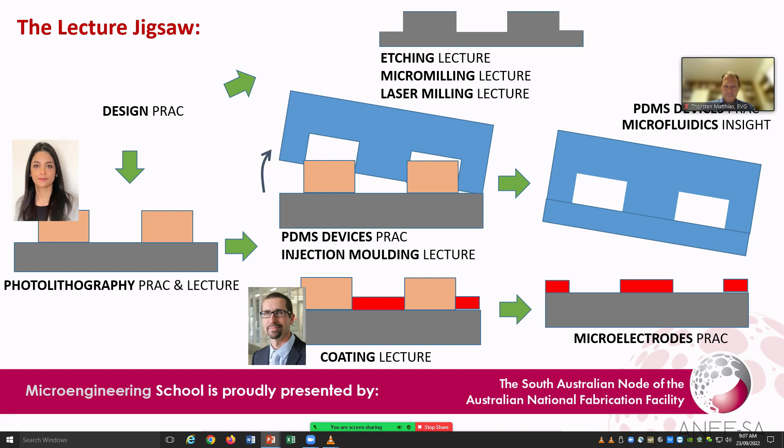Just to remind you of our little jigsaw here, you will have seen a few talks, and hopefully yesterday you took the time to dial in to watch the recordings that we've got. Colin has spoken to you about coating. We've had Mariam on photolithography, Dong Hoon on etching, Ben on laser milling. Now, micro milling you would have seen online, hopefully, a recording from Mark, some really nice work there. Please do check these out, these are fantastic. And Mike on injection moulding and moulding technology. Then today, Coco and Barak. So these are the lectures that you'll see, and of course the insights link all these things together in terms of devices. So by the end of this week you should have a rough idea what steps you could put together to make a small device.

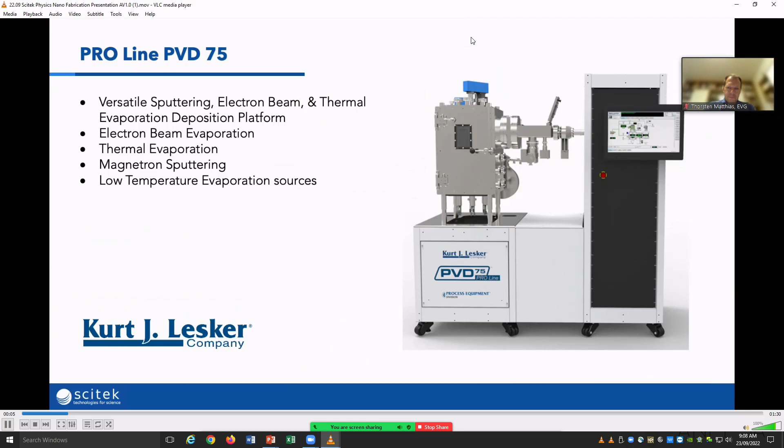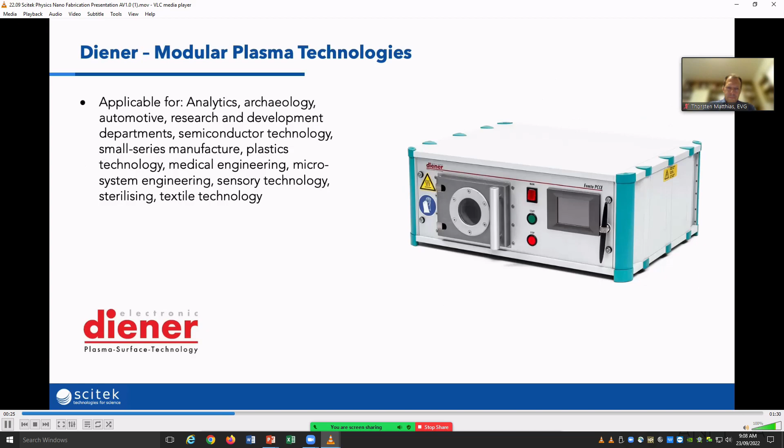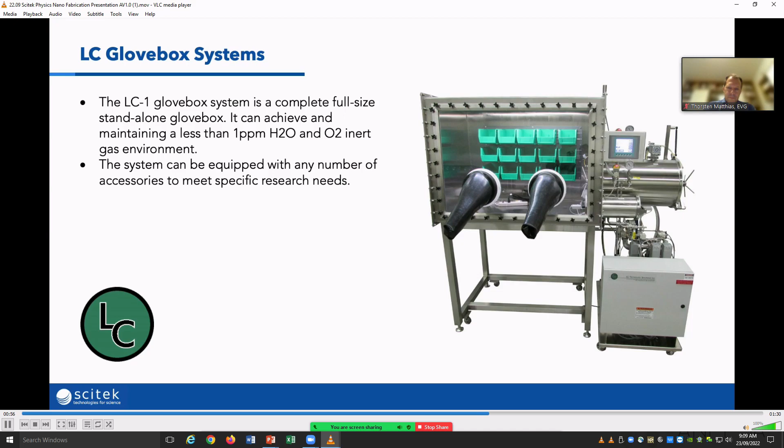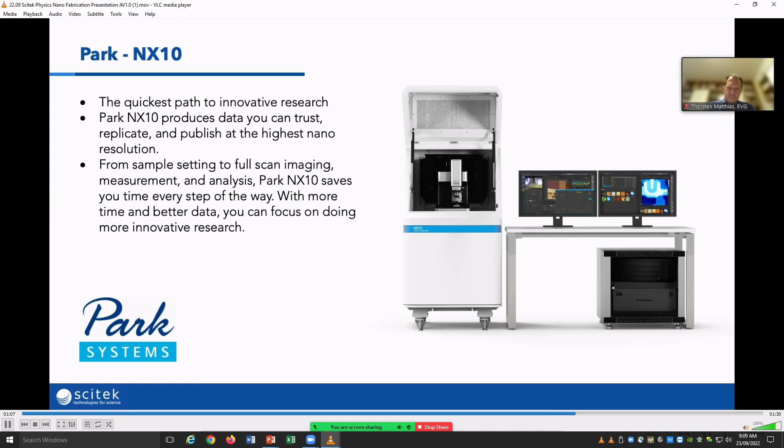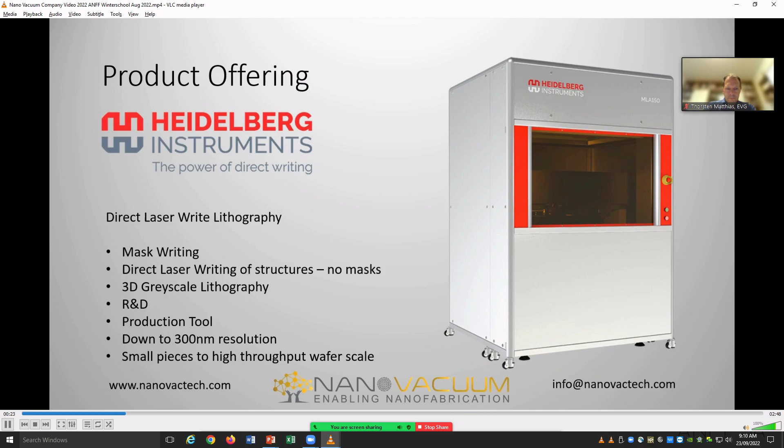So you saw just before there a maskless lithography system. We've purchased one of those for the South Australian node. It will come middle of next year. It takes a while to get these tools in because they're very complex and are made bespoke.

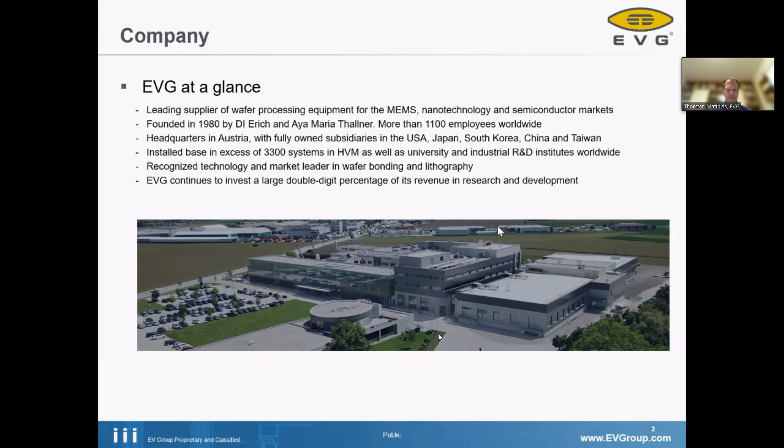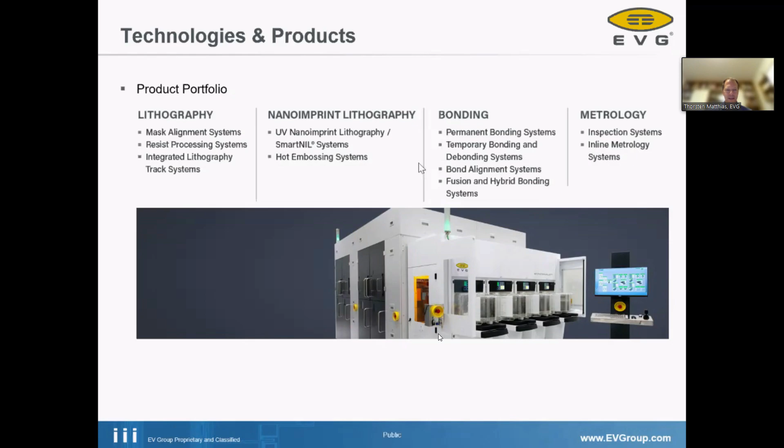Now let's jump into the technology, into the details - let's talk about wafer bonding. When we think about a new technology like wafer bonding, which might not be so familiar to everybody, a good starting point is to define what we want to achieve with wafer bonding, what the outcome is, what we envision if we apply this technology. I'll address some of these in the next 30-35 minutes.

As an outline, wafer bonding is a technology to permanently mechanically connect two wafers to each other. This could be for the purpose of creating a cavity - mechanically building a cavity in my microsystem where I can encapsulate vacuum, or a specific gas or atmosphere pressure. I can use wafer bonding to transfer thin layers of one type of semiconductor onto another, basically creating a stack of different semiconductors. I can use this to integrate wafers fabricated by different companies or in different fabs around the world - wafer bonding would be a means to create, on the micro level, on the chip level, a system out of various components.

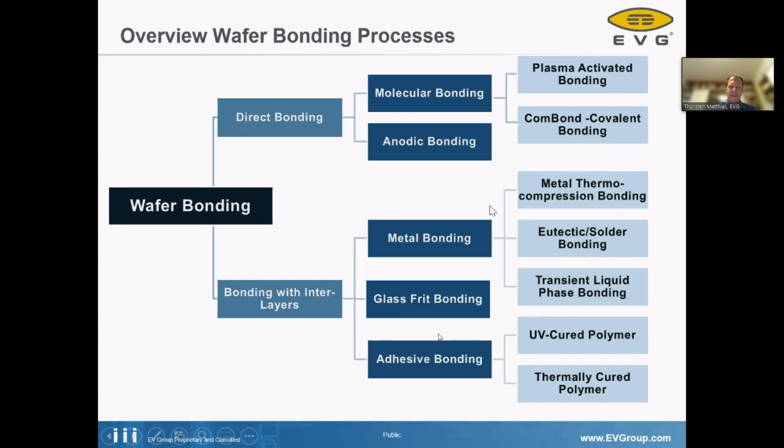Okay, let's start with the very first one, which would be adhesive bonding. You can think about there being a lot of thermally curing adhesives. Thermally curing adhesives have the advantage that they work with all kinds of materials, all kinds of wafers. But it requires a process step at an elevated temperature, maybe 80 degrees, 100 degrees, or even higher, so your wafers, your device, or your substrate has to be able to withstand that temperature.

If this is not an option, then a UV curing adhesive might be a good alternative. However, you have the limitation that to enable UV curing, one of the substrates has to be a glass wafer. Very often the challenge is we want to create a kind of cavity, as you see here. I can create directly out of my adhesive the sidewall, so an entire sidewall is my adhesive, or I create a sidewall with micromachining on one wafer and have a full layer adhesive film on the other wafer.

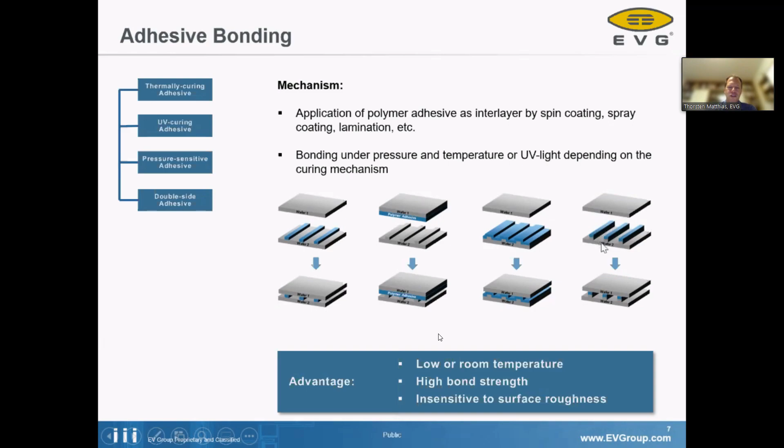I might also apply spray coating techniques, where I can conformally coat the micromachined surface, or I can apply a technique where I selectively deposit adhesive on my already established seal rings or sidewalls of my cavity.

In the course of the presentation, for all these techniques I use this comic-like simplification of the bonding process. The starting point is I have selectively deposited some polymer lines here. I bring the second wafer into contact. This might or might not be under vacuum or in a specific atmosphere, for example if you want a nitrogen atmosphere inside your cavity. Then for the actual bonding, you apply heat and force. When you apply the force, you deform the polymer a little bit. You want to make sure the polymer is really wetting both surfaces very well so that you have a strong connection. Then after cooling down, your bond is established.

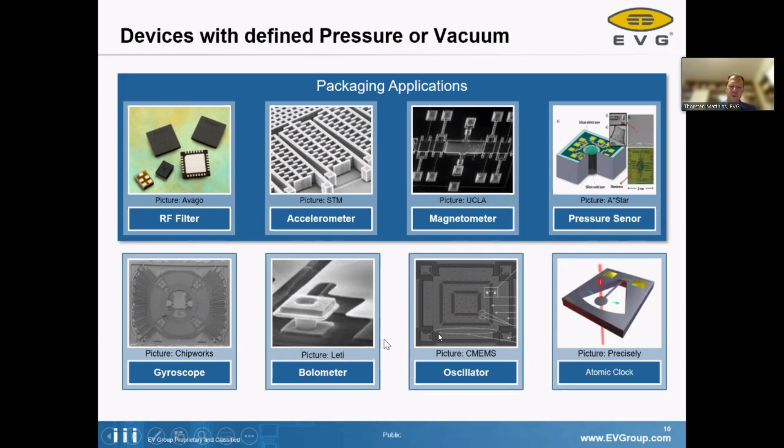And basically in order to read out the signals from our individual pixels, the measurement principle is strikingly simple. Basically you have each pixel in very high vacuum. So if a photon hits your pixel, it starts to heat up. As we have semiconductors, we can measure the change in resistance. That's basically our measurement principle. If a photon hits a pixel, it's absorbed, it heats up, increases the temperature of the pixel, increases the resistance, and we have a signal we can detect, or we can create an image based on the thermal radiation of our object.

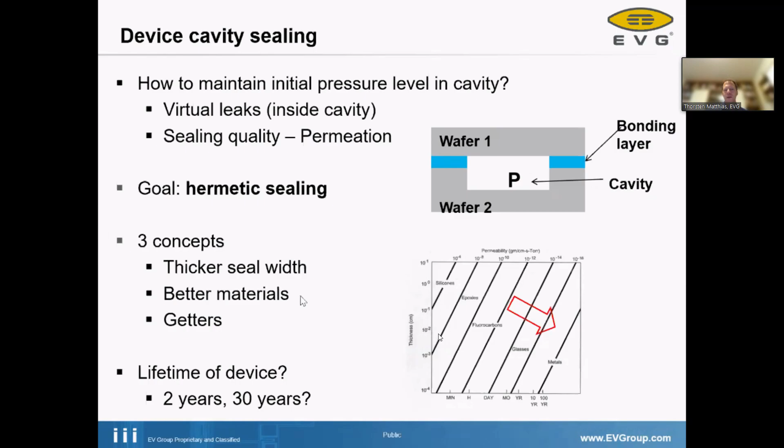So when we talk about what types of metal seal rings we can apply in wafer bonding, actually wafer bonding is kind of a dream world for metallurgists, because here we deal with all kinds of alloys, and we are dealing with it in a very, very pure base. All the materials here are deposited from typically very pure targets. So we can apply all kinds of things which usually are only in the metallurgy textbook. Here in the world of microengineering, microstructuring, this actually becomes a reality.

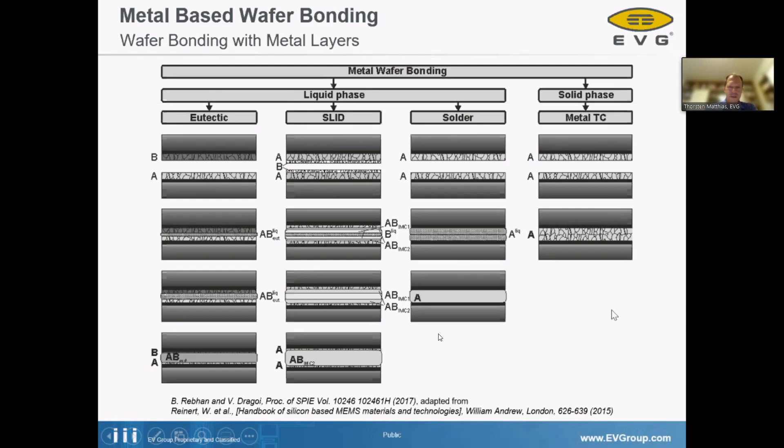This involves us very frequently dealing with real eutectic compositions, where you have two wafers with different alloys, and you have an alloying process. The solid liquid interdiffusion is a kind of subset of eutectic bonding, which I will address in a little bit. All kinds of soldering are possible, and there's also the possibility of diffusion-based thermocompression bonding. In the next couple of minutes, I will go into more detail about these technologies.

So let's start with thermocompression bonding. The idea of thermocompression bonding is basically that I use one material, or it could be an alloy, and I have the same material on both sides of my wafer, and I want to create a solid, permanent contact.

Basically the key mechanism, when you bring two metal surfaces into contact, you will always have some kind of diffusion between two surfaces, but you have to ensure that the surfaces are really, really close to each other in order that we have metal ion diffusion of any reasonable rate.

The materials we are talking about, most common is gold-gold bonding. For example, for RF filters, gold-gold bonding is being used, probably in all of your cell phones, you have some RF filters with gold-gold bonding involved. Aluminum, I will address in a little bit in detail. It could also be used, or copper bonding to copper bonding.

These bonding methods require a very high temperature, very high in terms of what typically the devices can or want to withstand. We have to go to a higher temperature, meaning a higher diffusion rate, meaning a lower cycling time. So this is basically the magic. There is a range, but the temperature is reasonably high for microelectronic devices.

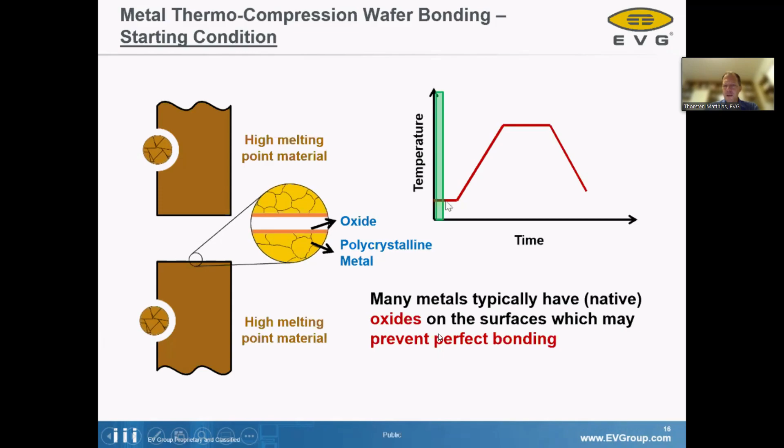In the case of wafer bonding, typically we flush the surfaces with reactive gas, like forming gas, or you might have a formic acid bubbler in order to reduce the surfaces and get rid of the oxides. And this happens at a starting point of the process, might be room temperature or slightly elevated.

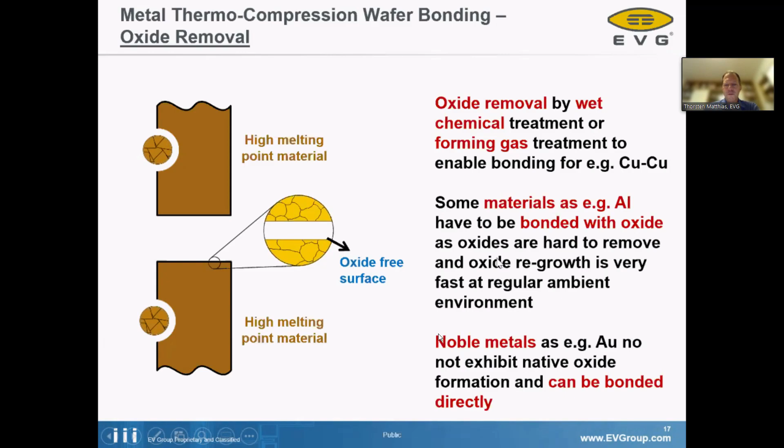Ideally, we are successful, we create oxide-free surfaces, and then we can bring the surfaces into contact, and then we start actually heating up, starting the bonding process and then increase the temperature.

Now here an important point is we need, for metal thermocompression bonding, very, very flat surfaces. So the wafer bonders can technically apply reasonably high pressure so that the materials can overcome a little bit, we can flatten out the surfaces a little bit, but the higher your density of your seal rings or so, it becomes very difficult to overcome.

If you have a gap in the interface, then basically you have a permeation path, a penetration path for gases, for moisture, and you will run into issues with the sealing quality, right?

Okay, so yeah, once we start heating up, basically we start to see metal ion diffusion. Typically the diffusion path is across our grain boundaries, which is kind of the diffusion highway in a metal system.

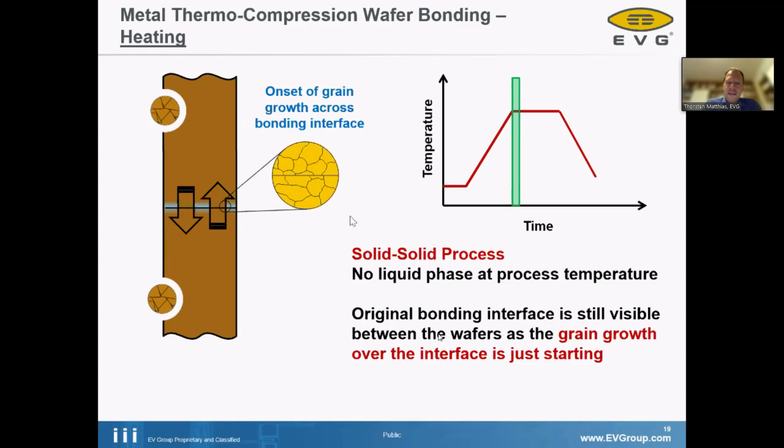So here we see, on this picture, basically what you want to see in your microscope. If you look at the interface, the bond interface has disappeared, and you see the nice grain growth across the grain boundary. At this point, your wafer bond is established, the connection is established. Typically in the system you cool down the wafer, but cooling itself does not have any impact or functional component for the metal thermocompression bonding process.

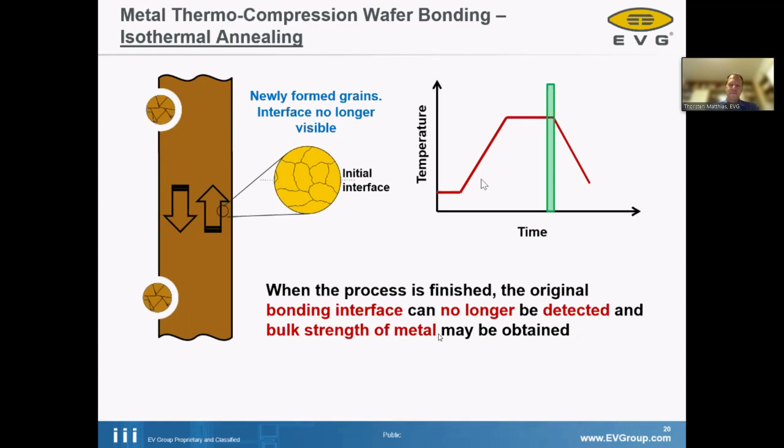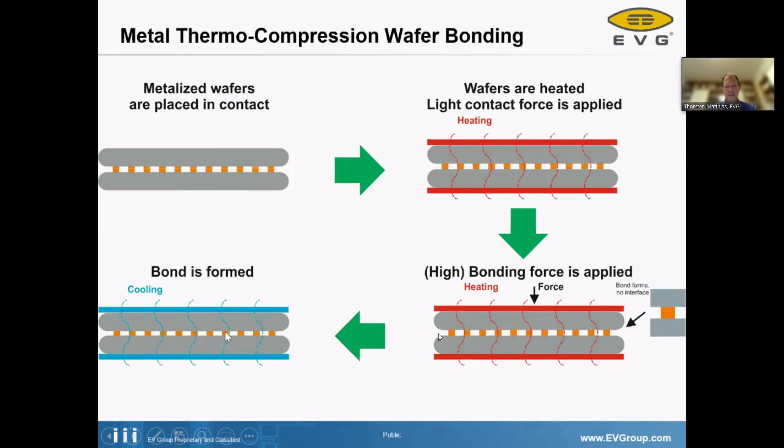So here I have again my cartoons. I bring my two wafers in contact. Typically in the wafer bonder I still have to apply some flushing with oxide removal, forming gas or something, to treat the oxide removal. Then I bring my surfaces into contact, I heat them up, and I typically apply a very high bond force. Thermocompression bonding is not the fastest process in the world, so typically we are looking at something like 20-30 minutes bonding process time, or even more. Then finally I cool it and I have my nice cavities and very good metal-based seal rings.

Now another very interesting way in comparison to metal thermocompression bonding would be eutectic bonding. I think you have all seen in your engineering classes at some point the eutectic diagrams, the phase diagrams. Here we have for a binary alloy like gold silicon, and we want to use this kind of oddity of nature that at a specific stoichiometric composition, the liquidus point is lower than at other stoichiometric compositions.

What this means is that during the bonding process, you start with solid metal surfaces on both sides, but during the bonding you have a short period of time where you create a liquid phase, a liquid metal film, in your bond interface. If you have a liquid phase, it becomes a lot easier to close all the gaps, to fill all the trenches or crevices you have on your wafer, in order to create a very nice hermetic seal.

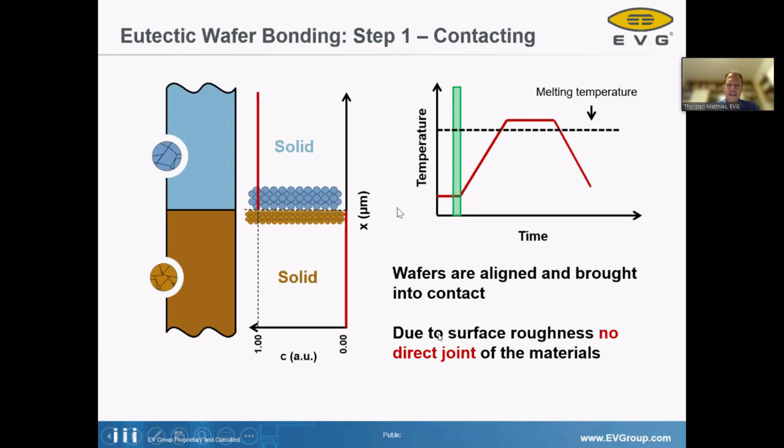So here we see again, I use the same kind of cartoon style demonstration for the bonding process. Let's assume I have a binary alloy, material A and material B. I bring the two materials into contact. At this point, I have two solid interfaces. But then during the heat up, I already see some kind of metal ion diffusion.

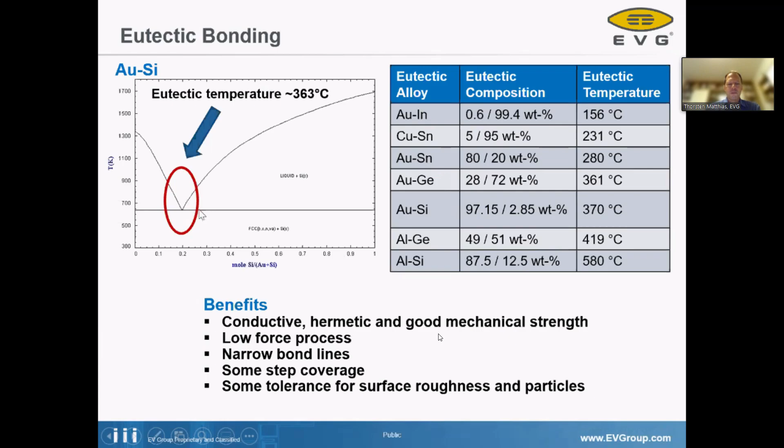What happens is, as I have this metal ion diffusion, I'm actually moving in my phase diagram from both sides towards a stoichiometric composition where I have the lower liquidus point. At some point, when I've had enough of this metal ion diffusion - here we see the temperature curve in the bonder - my entire system is at a temperature higher than my eutectic point. Then I start to see some liquid interface, and all my voids, gaps between my seal rings, are being closed just by the properties of having a liquid in the interface.

Then I have to cool down. In this case, the cooling down has to be very accurate, because if cooling down a liquid were not homogeneous across the entire wafer, it would be very easy to integrate stress into your device. Especially for a lot of MEMS devices, if you already create stress by the package, you probably already create some drift in your sensor. So cooling, especially the very first part going from the liquid phase to the solid phase, is very important for eutectic wafer bonding - you must do it very, very controlled.

The symbolization is very similar to what we have seen for metal thermocompression bonding, but the main difference is, in this case, during the bond process I go shortly through a liquid metal phase, which means with eutectic bonding it's a lot easier to deal with gaps in your interface. In other words, with metal thermocompression bonding, you have to take a lot more effort to avoid having gaps in the interface prior to the bond.

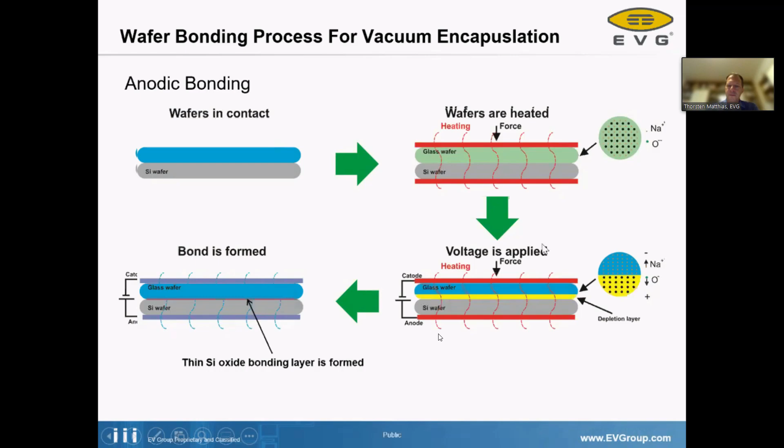But if you need a super strong interface, then anodic bonding is definitely one of the good candidates, because the bond interface, due to this migration of the oxide ions into the interface, creates a strong oxide layer. I grow a really strong mechanical contact between my two wafers.

Okay, and now coming from the world of the microelectromechanical system, the second example I wanted to show you is more from the microelectronics world, the more high-end devices in microelectronics.

As an example, I have here the backside illuminated image sensors, but then I will also draw the connection to some of the newest generations of CPUs, GPUs.

So in semiconductor manufacturing, I have the situation that in order to create a diode or a transistor, I need to implant selected areas with my dopants, and then activate the dopants at a very high temperature. The temperature required for dopant activation is higher than what the metals could later withstand. So the metal is a natural enemy of a semiconductor.

I need it as a means to transfer the electricity in and out, the signals in and out, but I cannot have them in my transistor area. So what this means is, in every semiconductor in the world, you first have to create your transistors, and then later on you deposit your metals on top.

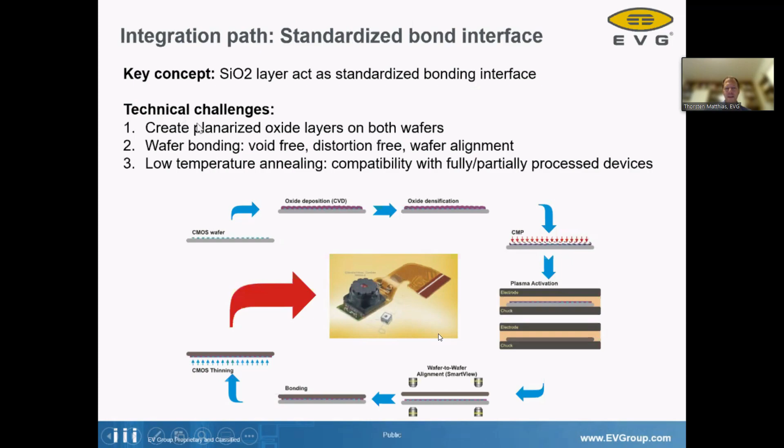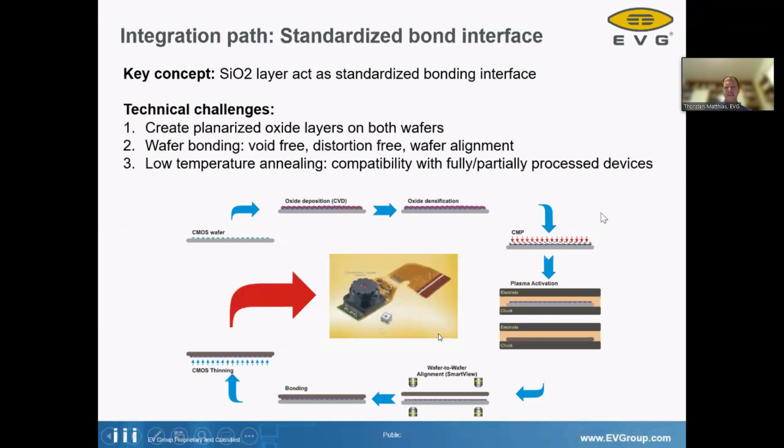It's void-free, it's very high alignment, it's very fast. So technically speaking, if I can create oxide layers and planarize them on both wafers, then I can use this fusion bonding in order to bond any kind of wafers, any kind of devices, and connect them permanently.

Just some trivia. Basically, this fusion bonding was first described by Galileo Galilei nearly 400 years ago. You probably know this phenomenon: if you have two microscope sliders with a droplet of water in between, and you press these two sliders together, it's very difficult to pull them apart. This force you are feeling is already an example of fusion bonding.

In the microelectronics world, this process has been used for many years. For example, all these so-called silicon on insulator wafers, where a lot of today's devices are being created, start with the wafer bonding, fusion bonding process in the wafer manufacturing.

So here, in a little bit more detail, how is wafer bonding or fusion bonding applied. I have my two wafers. I have to ensure that I have really super clean surfaces, so any particle in the interface will create a large defect. This is really a semiconductor fab process with front-end cleanliness required.

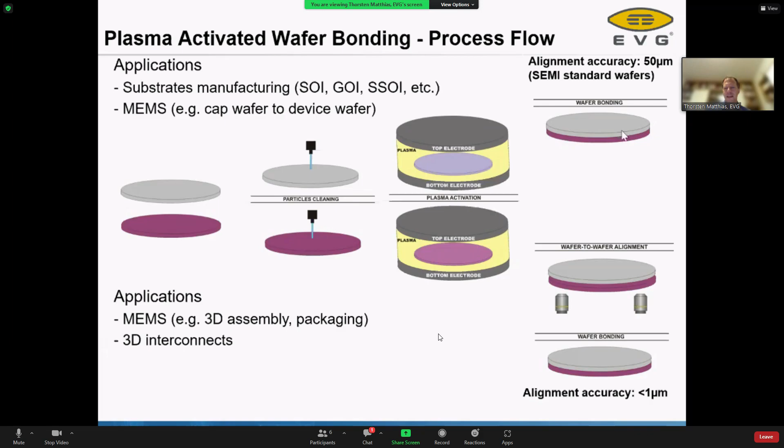Then there's a plasma activation step, and then finally the bonding, and the bonding actually happens at room temperature.

We have a so-called plasma activation, which means we are disturbing the crystallographic structure of our interfaces. We are enhancing the entropy in my system. Then with a very moderate annealing temperature, I can start a recrystallization or reorientation of my crystal lattices, of my oxide layers, and I basically get a gap filling. With fusion bonding, we are able to achieve bond interfaces without any gaps, without any voids.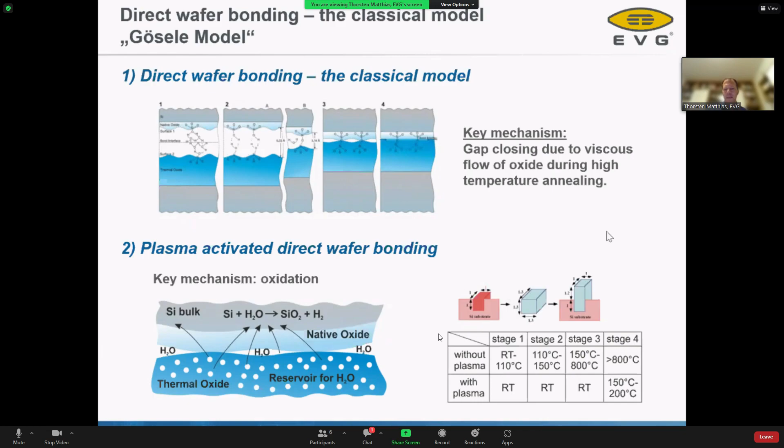So the bonding itself happens at room temperature. Initially, I create some hydrogen bridge bonding, but during the annealing process, this is transferred into a full area covalent bond between the two wafers.

And for those of you interested in microelectronics, if you look at the roadmaps of the next generation of transistors, you will see that in a couple of years, for the leading edge transistors, we will see more integration of different semiconductor materials into the transistors, and then probably in roughly 10 years or so, a transfer of 2D materials like graphene, also used for transistors. This transfer of 2D materials would also apply a wafer bonding process.

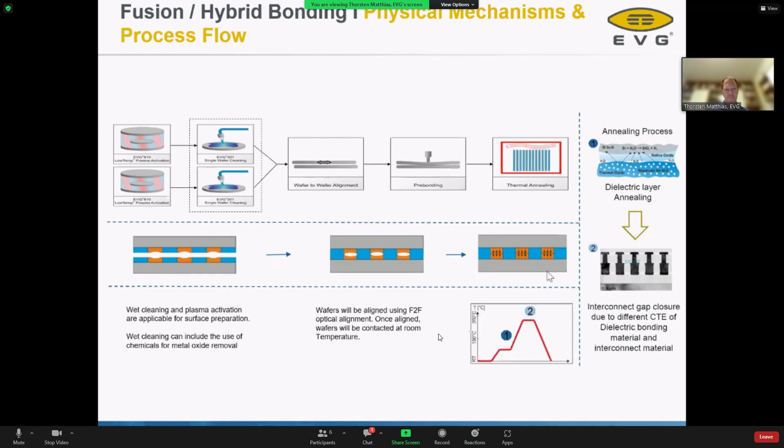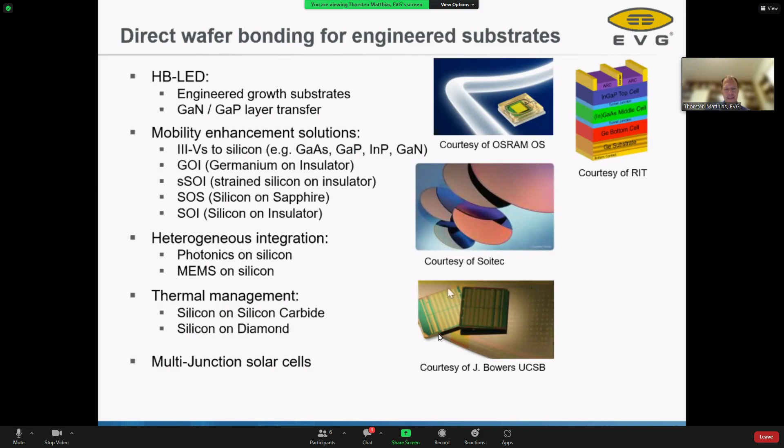On this slide, I just have that wafer bonding is being used for a lot of things. A lot of your electronic components of your cell phone use it today, and it's actually quite a versatile method. So to summarize...

It's established very well in high volume manufacturing—thousands of bonds every hour around the world, either for encapsulation of a cavity or for integration for the permanent connection on the micro level of two or more different devices.

In the lecture today, I wanted to give you a bit of an overview of how the basics of engineering are applied here for microsystem engineering, where we have the chemistry and physics of adhesive bonding, all the metallurgical and alloying processes, but also fusion bonding.

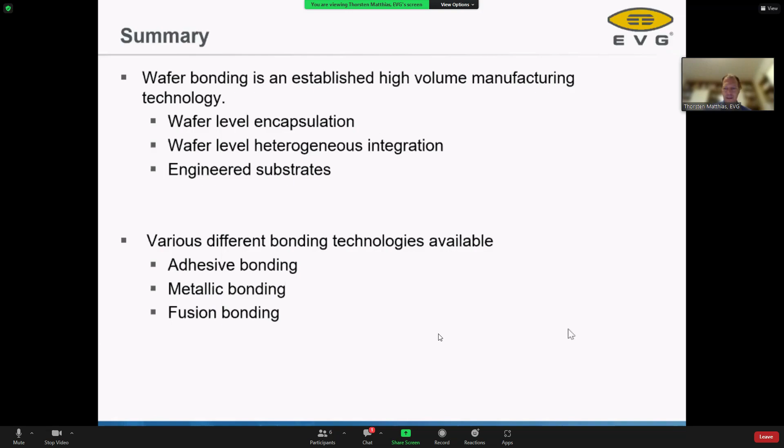So I think that this would be the end of my lecture for today. If you have any questions, I'm more than happy to answer them.

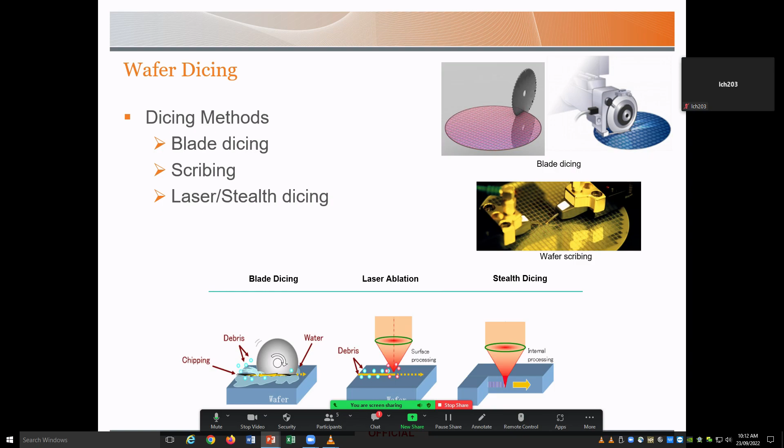So blade dicing is a common technique, especially for smaller research scale applications. This is what we use at DSTG, and this is also what is used at ANFF-SA at UniSA. In the blade dicing method, a diamond impregnated blade is used, very similar to how you might think of a circular saw, to dice up your wafer into individual die.

So how this is done is the wafer is attached to adhesive tape, which is mounted on a frame, and then this frame is aligned in your wafer dicer. You can program your machine to dice down your dicing streets, which is basically just the distance between your individual devices. It will dice first in one direction, and for most applications you have square or rectangular chips, so you will rotate by 90 degrees and then dice again in the other direction.

So there are quite a few benefits to using this blade dicing method. It can cut relatively deep in terms of microfabrication - a 1 millimeter thick wafer can be thought of as quite thick. It's very accurate, especially with these new automatic dicing machines. It's very repeatable as well. And it has a low running cost, which makes it very useful for research scale. So your only real consumable here is the blades themselves if you look after your machine properly.

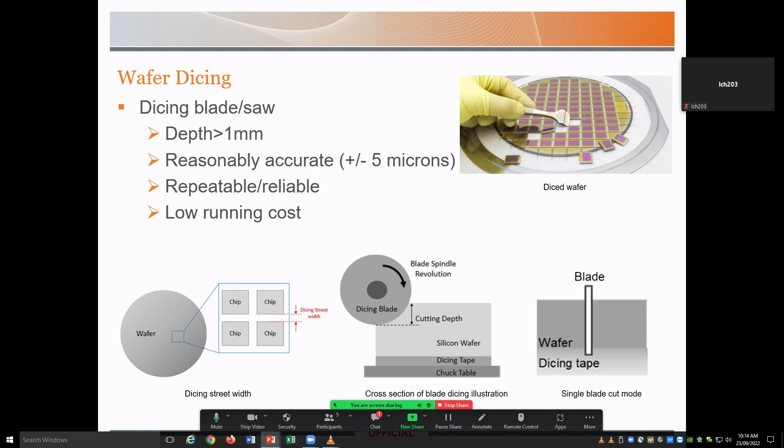So I'm going to talk a little bit now about the optimization of the actual dicing process. Obviously our number one objective when we are dicing is to cut nice and straight so we get really nice dies with minimum chipping and no heat damage. Secondary to that, we also want to protect our blade so that we can use it over and over again and reduce the running cost of the machine.

So as I mentioned, this is a physical technique using a diamond impregnated blade, so there's a lot of frictional heat generated in this process. This means that there has to be a water jet running which is directed at the interface of the blade and the wafer at all times, and this also helps with the removal of any debris that's generated during dicing. So there are a few things that we have to consider to optimise this process, and the properties of the blade that we choose is going to depend on the material that is being cut.

So, also the patterning of the devices on that wafer. The thickness of our wafer is going to determine the diameter of the blade that we need to use, and the street width is going to determine the width of the blade that we need to use.

Generally, you need to account for your kerf width being double the width of your blade, and your street width needs to be a little bit wider than that to account for any chipping. If you choose your parameters correctly, chipping should be kept to an absolute minimum.

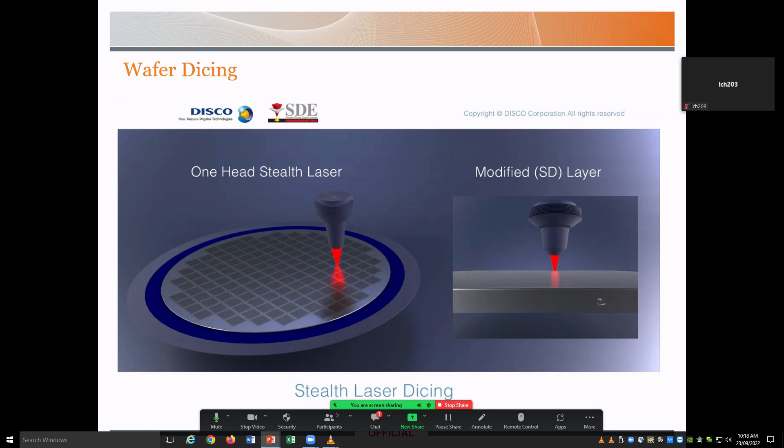It's cutting down the streets in the same manner as blade dicing, but it actually makes a modified internal layer of micro cracks. This means that when we expand the tape in every direction equally, these micro cracks are able to propagate, and it forms really nice smooth dicing lines.

This is really good because there's no heat damage here. It's also a lot faster than blade dicing, but it is extremely expensive. So for a commercial application, this would be more common than blade dicing, but it's not what we use on a small scale.

I'll pass over to Barak. Thanks, Joko, for dicing the wafer for me.

You can see in the monitor in this image, we need to pick one of these dies individually.

So from our experience, we used to pick these individual dies manually. However, this process can be very challenging because the dies are very small, and also it can be time consuming.

Because these dies are really stuck onto the dicing tape, we can physically damage these chips.

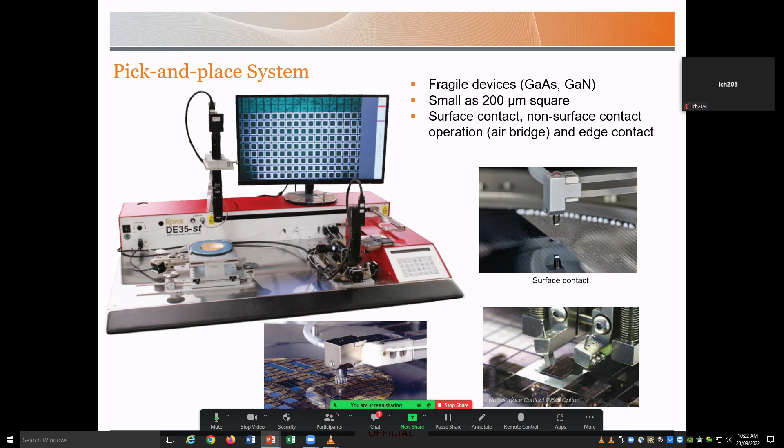So we have our die, individual die, and now we've got our printed circuit board or any desired substrate, and we need to place our individual die on top of the substrate. How do we do it?

So we place either conductive or non-conductive epoxy, drop off the epoxy on the substrate, and then we place the die on top of it carefully, and we put this in the oven to cure it. So we follow the instructions from the data sheet, depending on the epoxy we are using.

So the next step—we cured our die on the substrate and it's physically attached to the substrate, and then we need to make sure there's an electrical connection from our chip to the terminals. So the most common technique is the wire bonding technique. Wire bonding is a standard interconnection technique that enables electrical connections from microchips to the terminals.

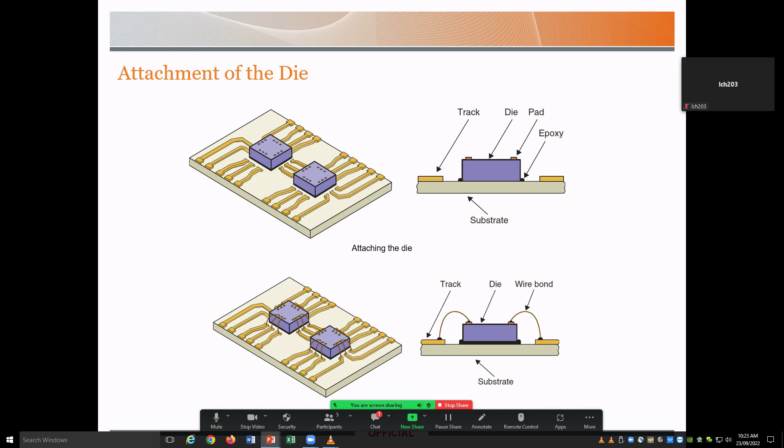Wire bonding is categorized by the bonding method. The first technique I will talk about is ball wedge bonding, and we generally call it ball bonding. So what happens here is, in the first step, you have your capillary, and you feed your wire through the capillary.

There's an electrical flame-off, an electrical spark, and it creates a free air ball, as you can see in the second step. Basically what happens in the second step is this melts the wire, and due to surface tension creates this free air ball. Then in the third step, the capillary moves towards the first target, creating your first bond with the ball shape on the first target.

And then the capillary, your bonding equipment, starts moving towards the second target and creating a loop shape. Then the capillary—sorry, I forgot to mention the third step—by applying ultrasonic energy and heat as your forces, you create this first ball.

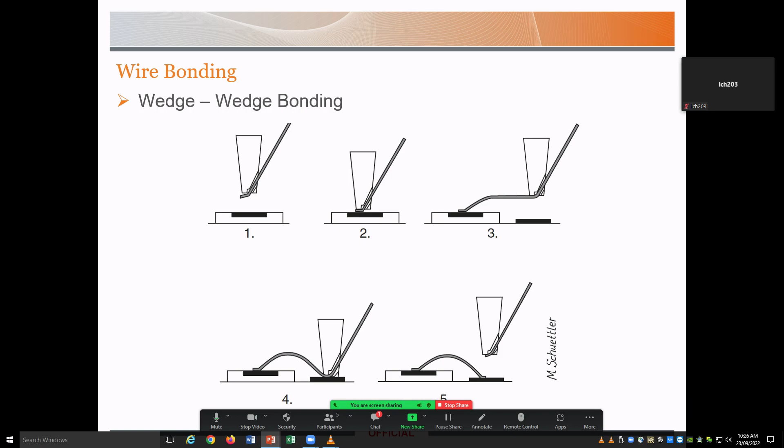And then the bonding tool moves upwards. So these two techniques have advantages and disadvantages; however, the bonding method is decided by your application. You can clearly see in this image, in this video, how the ball bonding is created.

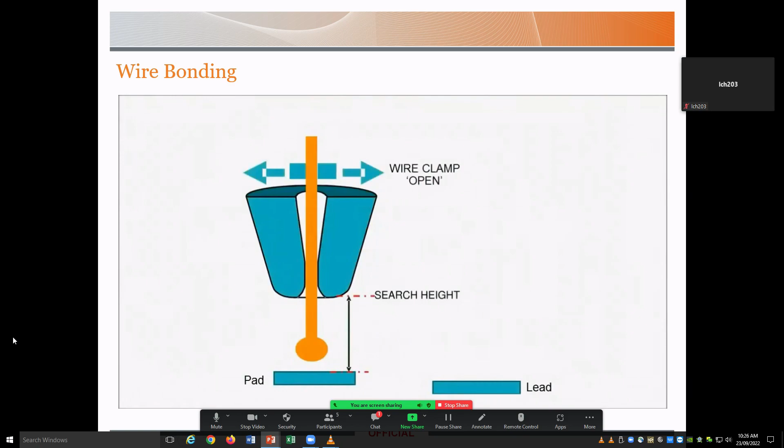Applying heat and ultrasonic energy creates the first bond, creates the loop, and the capillary is moving towards the second target.

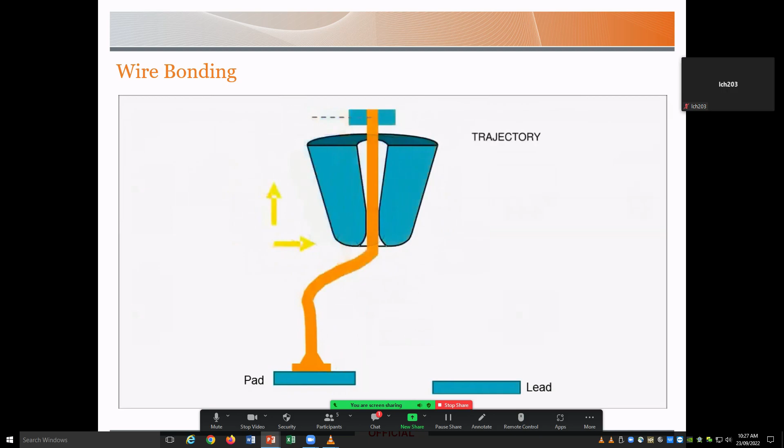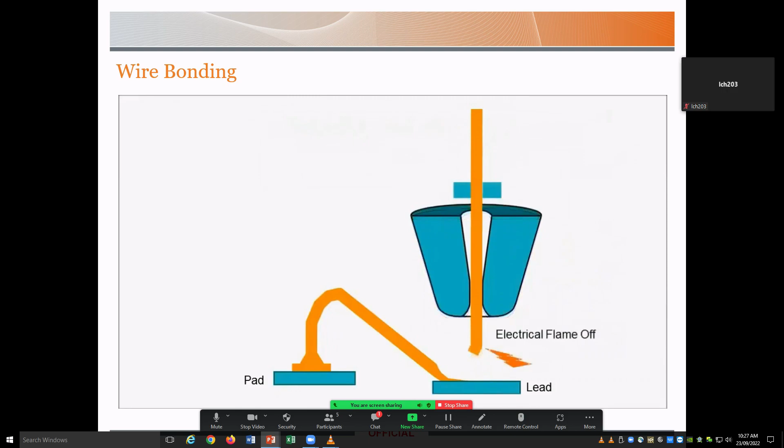We are about to create our second bond, it's a bit glitchy, sorry about that. Creates the second bond under the heat and ultrasonic energy, and the clamp closes and tears the wire. And creates again, you can clearly see the electrical flame off, creates the ball for the next bond.

And reverse bonding. So why do we need reverse bonding? In order to have a stable wire bond, in some circumstances we need to do reverse bonding. Generally, wire bonding is considered as forward bonding. However, a chip like you can see in this image, a high chip from the substrate, you might need to have control of the angle of your wire, and you might need a longer wire loop.

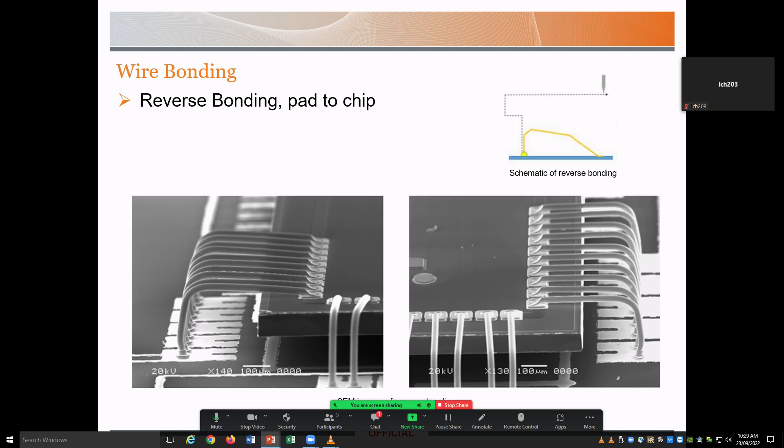So in this case, the reverse bonding is required. In my experience, I had a similar chip, like a 1 millimeter high chip, and I tried to do forward bonding. However, the wire hit the edge of the chip, and this caused a break in the wire. So if we do reverse bonding, we have a stable wire bond.

So what do we have at DSTG as a wire bonder? We have manual wire bonders, and also we have automatic wire bonders. When I started at DSTG, we only had one 58 series F&S bonder. Now we have two of them, and we have changeable bond heads. This machine is capable of manual and automatic bonding, and you can have one wire per second.

So the top one is the ball bonder. We have two wedge bonders, depending on the size of your wire, and we have heavy wire bond heads. Also at the bottom you can see a little image, and this machine is capable of doing multi-wire programming. You program it, you can see on the screen the microscope there, and you can program your wire bonder to do hundreds of wire bonds.

This might take a little bit of time, because when you say automatic wire bonder, it might sound straightforward. However, this programming takes a little while. But when it's programmed, you push one button, start, and it does the job.

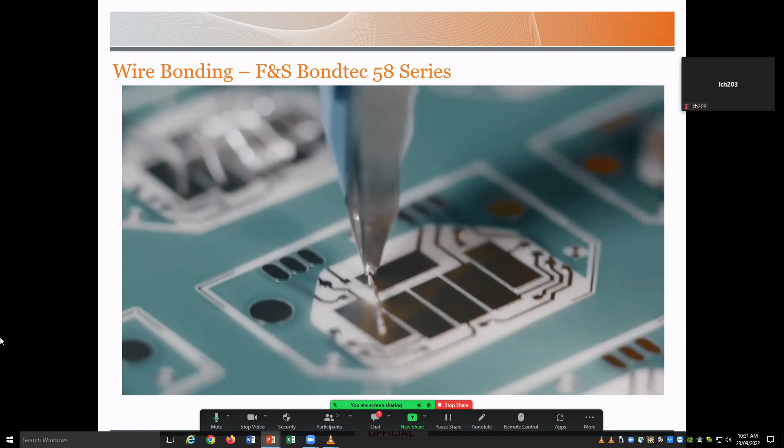So this is the video of our wire bonder. You can see this is a wedge bonding with the aluminium wire.

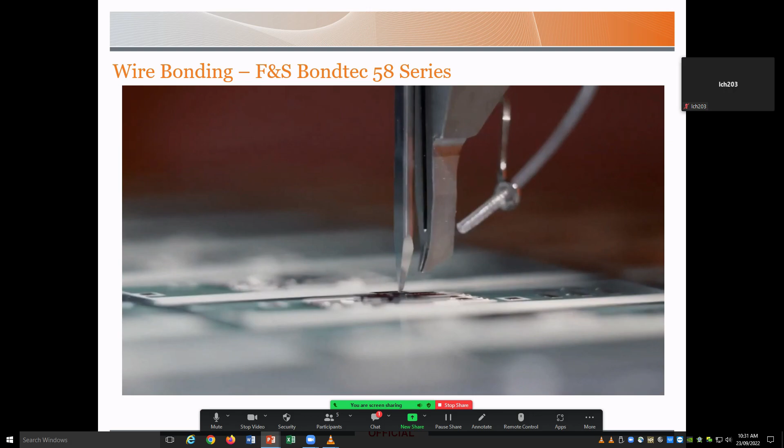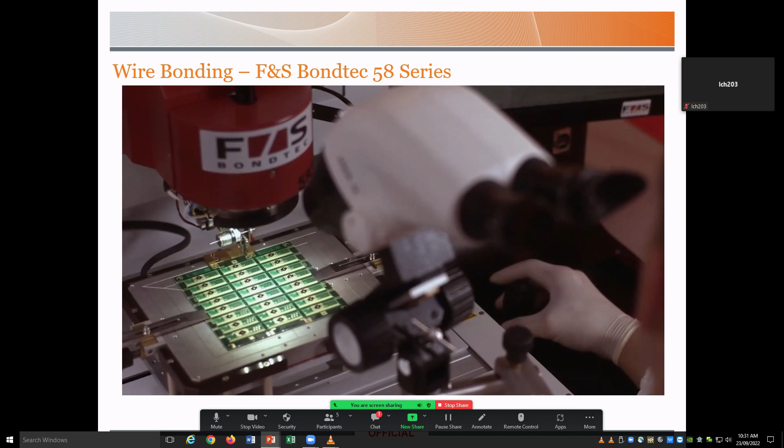So obviously this has been programmed, and you can see how quick this is after it's programmed, and bondable changeable bond heads, very straightforward. You just need to calibrate after you change the bond head. You can either inspect through the microscope or through your monitor.

This is an example of some of the applications. We don't do it, but this is part of the F&S Bondtec, so you can do battery bonding.

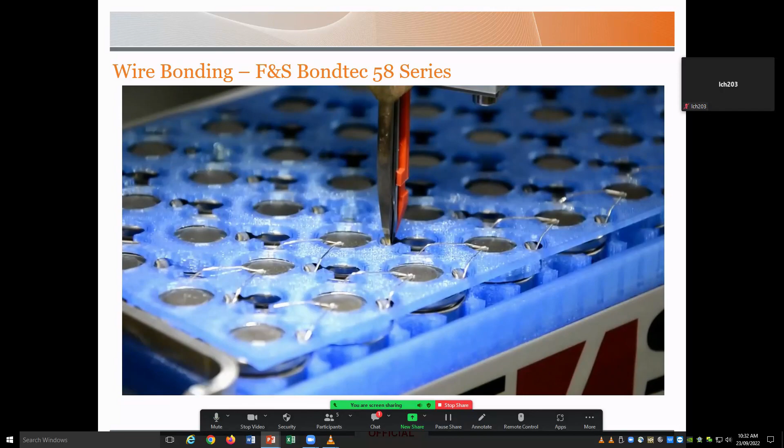So another capability we have at DSTG is flip chip bonding. Flip chip bonding is another micro packaging technology, a bonding technology.

In the top image you can see there's your die, and you have perfect spheres on the pads of your chip. Then you flip your chip and take it onto the substrate and place it on top of the corresponding pads with the substrate, and then apply heat. This can be on a heated stage, or these solder bumps can be cured in the oven.

So here on the left-hand side you see a flip chip bonding system. Basically there's a vacuum stage, there's your flip chip, and there's a substrate with the gold bumps on it, and there's the heat stage.

So what happened here is your flip chip is picked up by the vacuum tool and then placed onto the substrate on top of the gold corresponding contacts, under controlled force and heated through, and these bumps are cured.

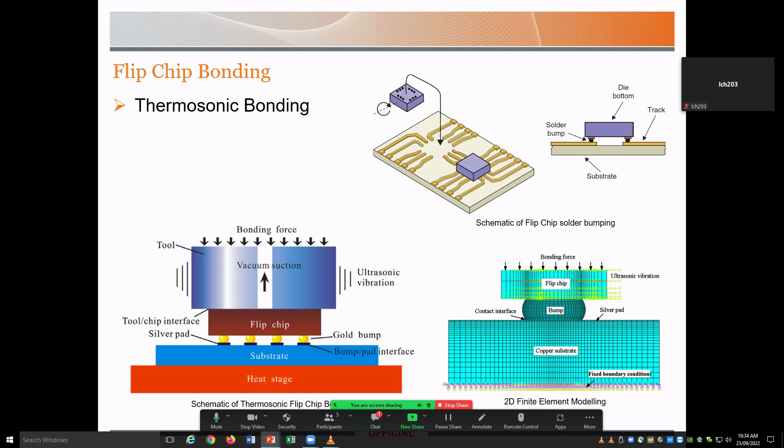So how do we test these wire bonds? Before I go into wire bonding testing methods, the more important part is the material. In the ball bonding and wedge bonding slides, we basically use wires from 17 micron to 50 micron at the moment, depending on our applications. Gold and aluminium wire are 25 micron diameter, and in the past copper wire has been used. So you have your design, your die, and depending on the fabrication process, you choose your wire materials.

Also, the substrate, your printed circuit board, plays a role. The metallization of these printed circuit boards is really crucial, because you need a reliable, stable, very strong bond from your chip to the printed circuit board. You have to consider this when designing or purchasing your PCB. Also, the pad size is really important, because you don't want your bond size to be bigger than the pad size on the substrate or on your chip.

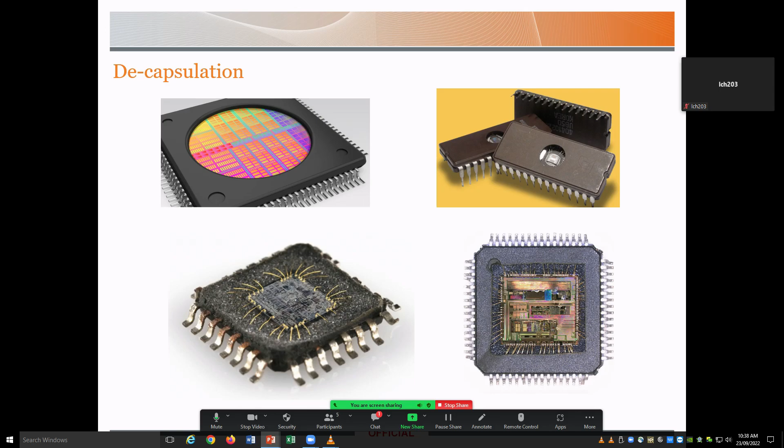The first step before we jet etch is to X-ray our package. This shows us the location and size of our chip within the package. We can also see some wire bonds here too if you look closely, especially with a high resolution X-ray. If you can see that some wire bonds are already broken, it means that during the jet etching process you can just decapsulate a specific area and focus on where that failure has occurred.

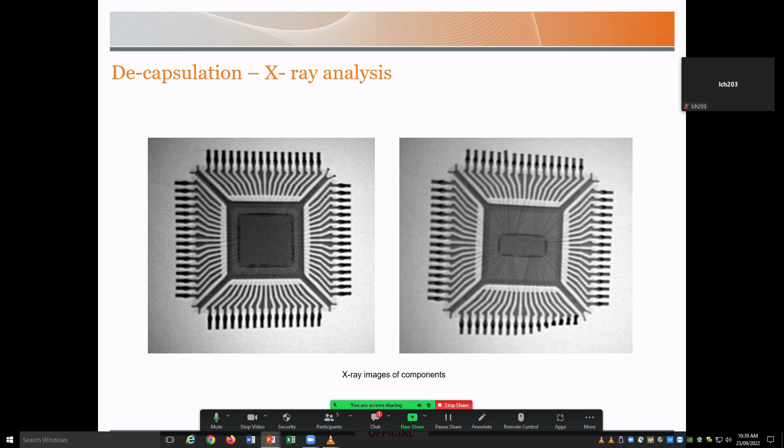With jet etching, we generally use two different types of acid depending on what the package has been encapsulated with, which type of polymer, and that is fuming nitric and also sulfuric acid. We can program this machine to heat a specific volume of acid over a specific period of time to a specific temperature and expose our package to that acid, which will gradually react with the polymer surface and expose our die.

Then our package will go through subsequent cleaning stages, and we can assess under the microscope whether we need to do further decapsulation or whether that is sufficient for our testing. At this point, if some wire bonds are also exposed, we can go back and do wire bond pull testing as well for quality assurance.

It's worth noting that with these jet etching machines, they're completely encapsulated themselves, so there is no actual contact between the operator and any acid, so they are very safe machines too.

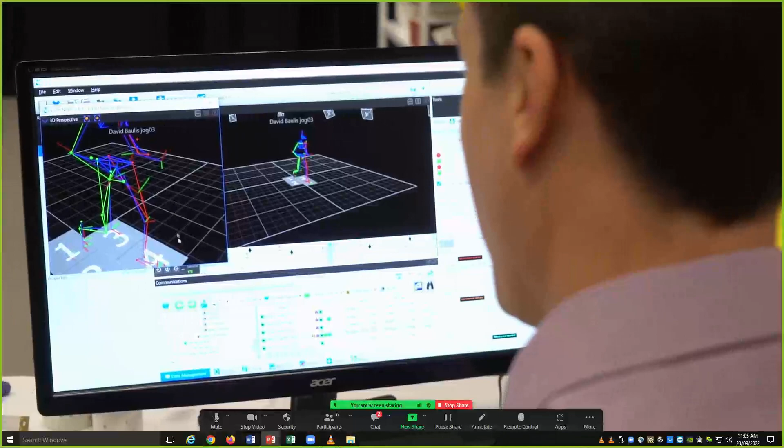The medical device partnering program is fantastic because it gives you an opportunity to be involved in possible product development or prototype development. So at that leading edge of where an idea might be coming from an idea into something tangible, and having lots of input, which brings so much experience to the table as well.

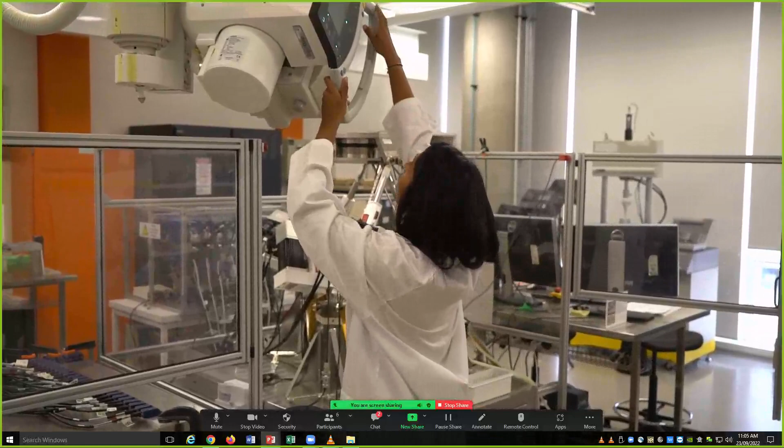And you can have multiple experts from multiple domains looking at your idea from all of their different perspectives. So it can be mathematicians or engineers or designers and end users, people who might use it and people who might make it for you as well. It's even hard to describe how valuable that is to someone who's just got an idea and who wants to move it forward.

I was looking for ways of collaborating on these projects to try and commercialise some of the ideas that I was having through my work as a registered nurse.

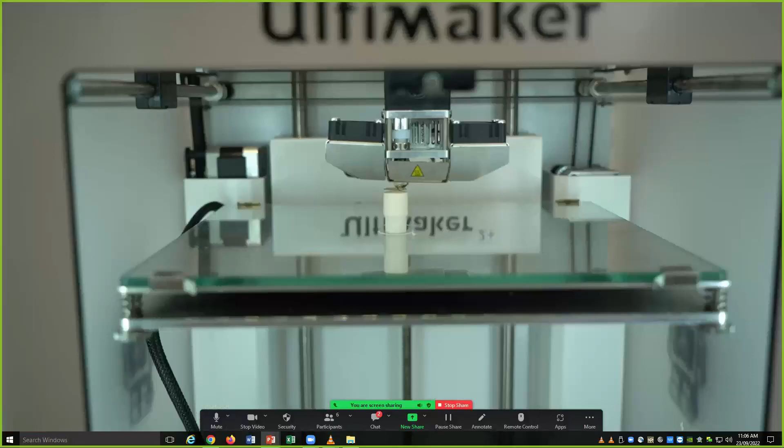We've needed 3D printing, engineering support. There's a lot of complexities. It also gave us access to academic staff, which we needed, because we were looking for proof of concept.

So we sat down and they really critiqued the project to look at some of the things I hadn't considered, some of the commercial aspects, some of the manufacturing aspects.

And actually, it's not just research for research's sake, it's research that will help develop ideas, but ultimately help to benefit patients. So it really is focused about improving clinical outcomes, improving quality and safety, and making something efficient and making something work.

It would have made such a difference to me and all the women I met while I was going through treatment to have had something like this that would have allowed us to just have one surgery. Just a few weeks can make an enormous difference. We just need as many tools in the toolkit to deal with cancer as we can possibly get.

The MDPP was able to provide market support research, which was critical to actually being able to get this device to the point that it's at the moment.

So that video is good to give a bit of context on some of the people that we work with, and to show that it's having real-world effects. And a lot of the people who do come are typically clinicians.

Really, the MDPP's initial vision was to make Australia the fastest place in the world to take an idea for a medical device from the idea stage all the way through to having a product on the market.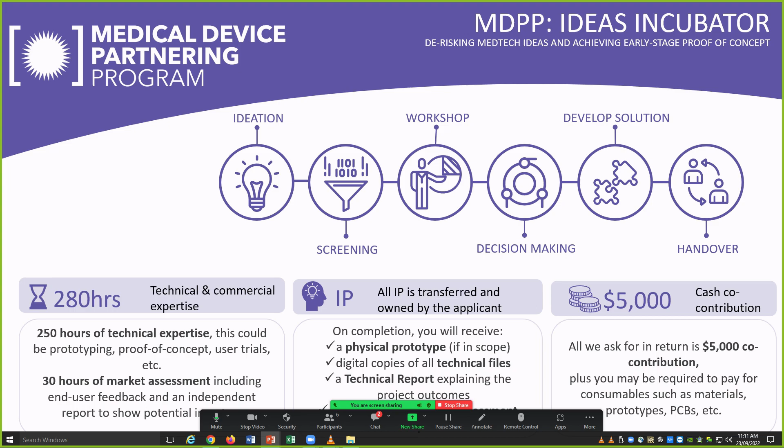We're very lucky the program's been running a long time, so we have very good links into the clinical community. Where companies may struggle, we're really able to get some very valuable people. We've had companies that haven't gone on to do the 250-hour project with us, but off the back of the workshop have created a company. Then we have an independent assessment panel that ultimately makes the decision on whether we're able to do a project, and then we do that 250 hours of work.

So just as a snapshot of how we've progressed over the last 14 years, I think we're actually over 125 projects now. We did a quick analysis to try to see how much capital had been raised by some of our alumni just over the last 3 years. It's probably much more than that. It can be quite difficult because we've got quite a large breadth, and not everyone is well connected enough to capture all of that, but at least $30 million.

We've assessed more than 750 ideas. Every year we have 100 people from more than 50 organisations contribute. So it's a big operation, growing over time, with some examples of companies across the top there. We're also partners on some MTP Connect grant programs. MTP Connect is the National Growth Centre for MedTech and Pharmaceuticals. We have representation on the medical device streams for both BTB and TTRA.

We're the medtech lead, and for the one in the middle, CTCM, which is medtech specific, we're one of the three partners in that. This is a national program. We have funding through MTP Connect to run our ideas incubator nationally, and also these national grant programs, which are a follow-on from that ideas incubator stage, helping companies progress towards the clinical trial stage. So we've got good breadth in terms of the companies we're working closely with.

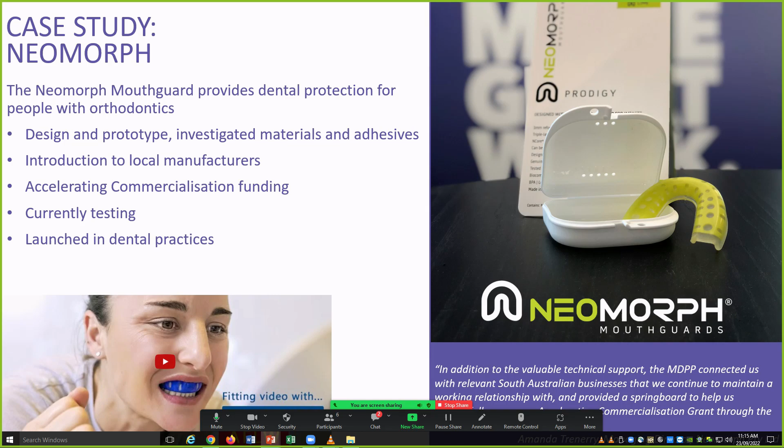Not only did we connect her with the material scientist to help develop the 3-layer polymer, but also gave her advice around the commercialisation. So she manufactures these in Adelaide, and she's selling them across the country, including to some AFLW players, as you can see in the bottom left.

And finally, I don't think I'll get on to my final part, but another example of a company we worked with - we did some environmental test lab validation work for a company called Plasma Shield. They do air filtration, using E-beam, so where most filtration systems use a filter, it means you need more air conditioning units to pump more air through. This is a non-filter based system, so you can drop the number of units running, which is a cost saving to the company and to the ventilation company supplying the units. They put some of these in and it provides comparable decontamination.

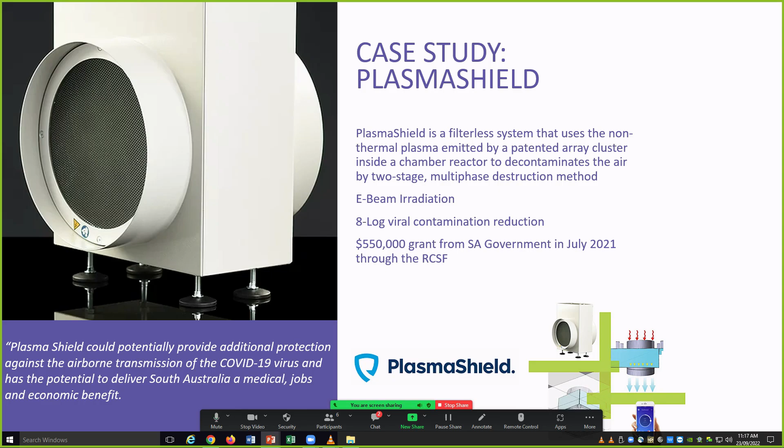So I'm not going to talk too much about this, I'm going to flick through lots of slides before Belle kicks me off. But one of the issues we've identified is that there's a lot of requirements in terms of medical devices. Different classifications mean you have different levels of quality management system and compliance that you need to perform.

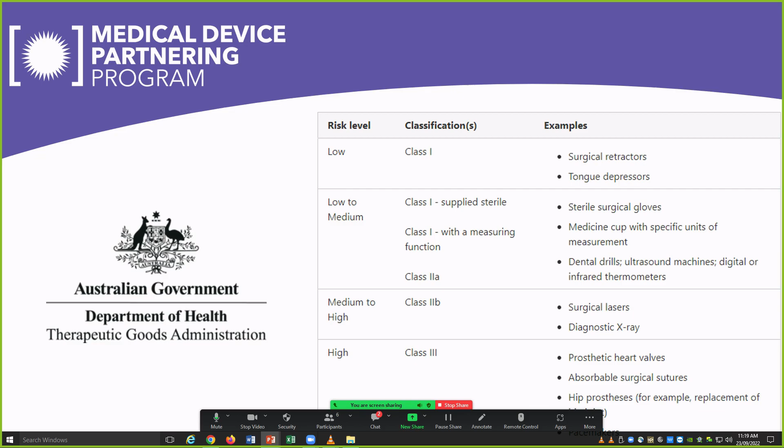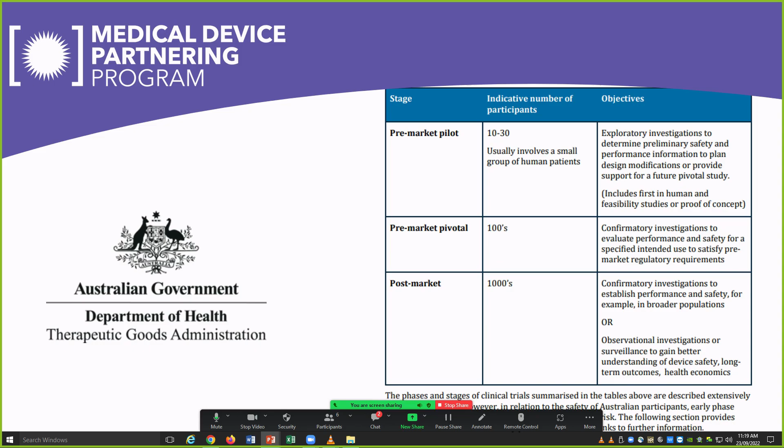This is a big bottleneck for companies at the moment. We've seen a lot of talk recently about the pharmaceutical industry through COVID and the requirements for trials. Medical devices are a little different - we don't have the 3 phases in the same way, but we do have a pre-market pilot and a pre-market pivotal, and there's a lot of requirements for companies to have set up a quality management system in order to get to that. The problem was we don't have a lot of expertise in the country to do that.

We do have some companies that will take on legal responsibility for you, but then you're stuck with another company being your manufacturer. There are consultants which charge you lots of money to set it up, but they don't necessarily teach you how to run it, and it's a big undertaking to try and learn how to do one of these things. So all of this documentation is all publicly available.

ISO 13485 is the quality management system, and there's a whole process behind how you set up and navigate it. Really the idea is that when regulators in different countries want to come and audit what you've done, you have a standardized documentation system, so they can say, where's this document, and they should be able to see how it all fits together, making it much simpler. That's standardized across the world, so everyone has to fit that, and the problem is that it can be quite difficult, especially for a startup.

And if you are a startup and you want to get to clinical trials, you need to go through this process. You don't need to be accredited, but you need to go through the vast majority of this process to do your clinical trial, because you're going to use that on patients and there's a risk to the patients, so they're not letting you skip these steps.

So one of our future plans, again through ANFF, is to set up a facility that will help train people in how to set up a quality management system. The aim is to do on-the-job training, so companies will come and be based with us for a period of around 12 months, and we'll train them in how to set up a quality management system and have access to, particularly, some of the testing and validation equipment required to meet some of the regulatory requirements. And that's it, thank you.

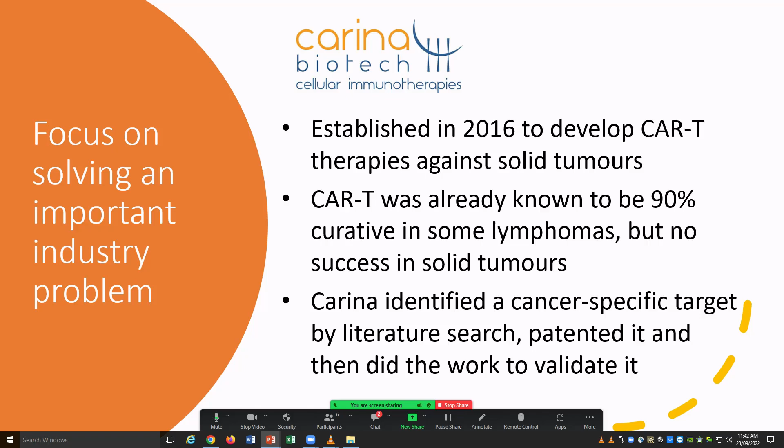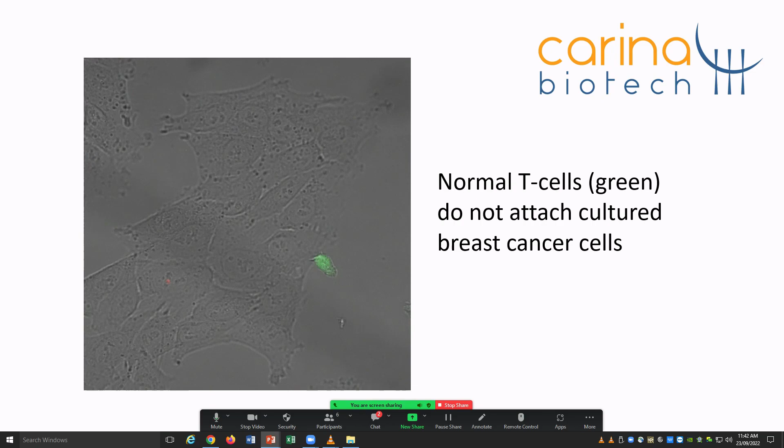What we then did was genetically modify the same CAR T cells from the same patient to recognise something that was on that cancer cell that it could target. And this is the effect that you get.

You start to see the T cells say, hey, something good's going on here, and they all start gathering in. Then you'll see a lot of red appearing because there's a dye in there that when cells die, they turn red. So that cancer cell in the background is progressively being destroyed, disappearing and going into dead clumps. Within minutes, this CAR T cell was recognising and killing the cancer cells.

CAR T cells, and you can see it just totally destroys the cancer. So we're about to get, we hope, FDA approval to start a clinical trial on this. It's a real buzz to actually develop this technology and now be going into humans, and we hope being one of the pioneers of curing cancer, solid tumours with CAR T cells.

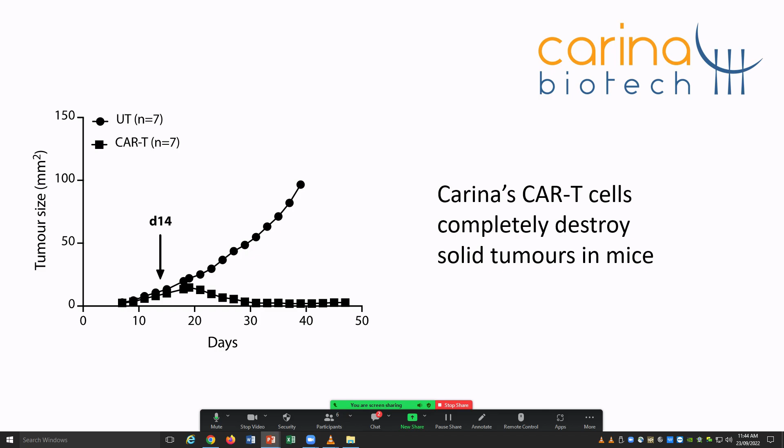But the bottom line was, the reason I said this, is that we did it the other way around. We said, that's the problem, you've got to find something specific for solid tumours. Let's develop something, patent it, because you have to have patents in this field or else you'll have no competitive position. And it's looking very promising.

So a second learning is that you can't do it alone. I think you've heard that story from Stephen very strongly already. There's a lot of expertise that's needed there. There's no way that you can do this with a little company focusing entirely internally.

But it's difficult for a small company because you haven't got much money. You can't go out and appoint everybody that you need to be appointed. So what we've done, both companies, is get a very strong independent board that really understands where we're headed, and has all the networks internationally that we can go with, and also advisors and partners to work with internationally, because this thing is not an Australian problem. Australia is a very small market for this sort of thing. And in both cases, we've got some industry leaders who have come on board and really been helpful.

And Mike Jensen, for example, is really one of the pioneers. He actually was one of the inventors of that immune therapy for lymphoma that I mentioned to start with. And we thought, oh, well, it'd be nice to approach him. And then we thought, oh no, he'll just, we're a two-bit little company in Australia, he'll just tell us where to go. But we went along to him, and he's so generous. He's a paediatrician, they're always nice people. And he's really helped us along the journey really solidly.

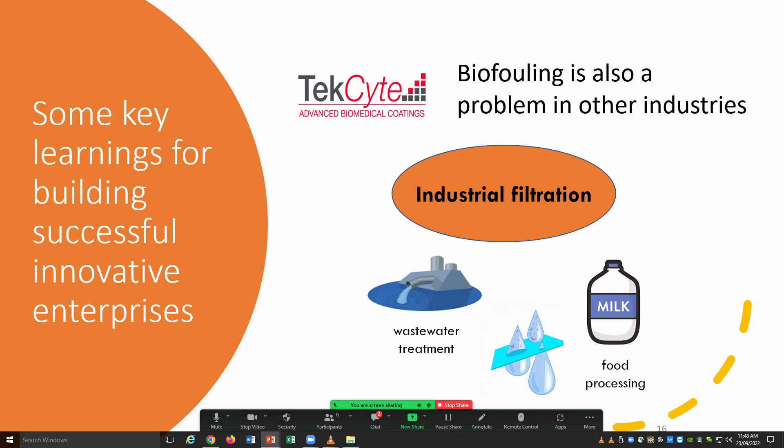And we're developing this nicely in this market. However, what we recently thought was, well, where else is biofouling a problem? And one of the big areas, which may end up being the real success for the company, is the industrial filtration area. So be it treating wastewater, food processing, and so forth. Desal plants, for example, all use membranes which get particles building up on them and causes real problems. And we're just getting some very good early results with that. So for all we know, TekCyte, which is a medical device company, could well end up being an industrial filtration company in its success. So you're just thinking outside the square, where else can we apply this?

And then finally, how do you get money for all this stuff? That's a real toughie. Usually when companies first start up, there's a little bit of money there from, as it's often said, the 3 Fs: friends, family and fools. But then you get to the point where you need a bit more, and where do you get it?

Unfortunately, venture capital is not always the answer. That's the sort of big money, and you certainly need that if you're going to go. Carina, for example, is just finishing a raising for about 8 million. It'll burn that within the year when you're going into clinical trials. The next raising is going to be 25 million, so it's not trivial money.

Unfortunately, Australia is not very good at this. We don't really have that depth of funding, so we're probably going to go to the US for that. But the first one might not be the right one, and venture capital is not for companies that are not really high growth, for example. So it may be tempting to take money from the first one that comes along, but it's not always the right decision to make.

So I will conclude there, with a statement, as I said I started out with: science training gives you all that problem solving, thinking outside the square, innovation. You can apply it to anything you choose to do. And I wish you the very best for your careers. Thank you.